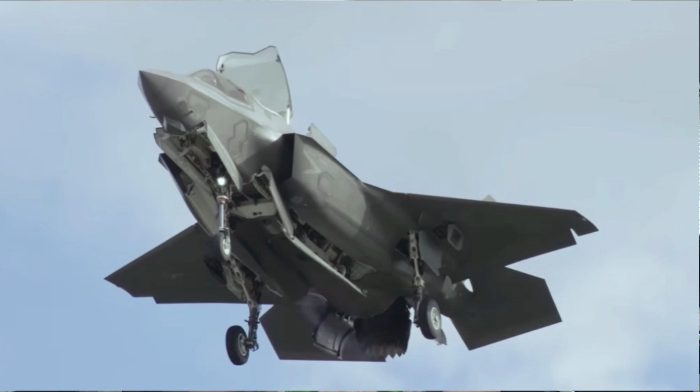But to compensate for that weight while adding all those 19 doors, we're going to replace some EDFs. So what I'm going to do is remove this heavy 130mm EDF. There are now two Schübeler installed, which together with the ESCs weigh almost 5.5 kilos. So I'm going to swap them to those compact 120mm from JP, which is only 680 grams.

So this will be, for example, like 200 grams for the ESCs, 2 times. That gives 1.6 kilos total instead of 5.5 with the Schübeler. This is a big reduction in weight. And this 120 can also push like 9 kilos, so we're going to use 2 of those. And for roll stability, we're going to add 2 40mm EDFs, which are tilted in the fuselage.

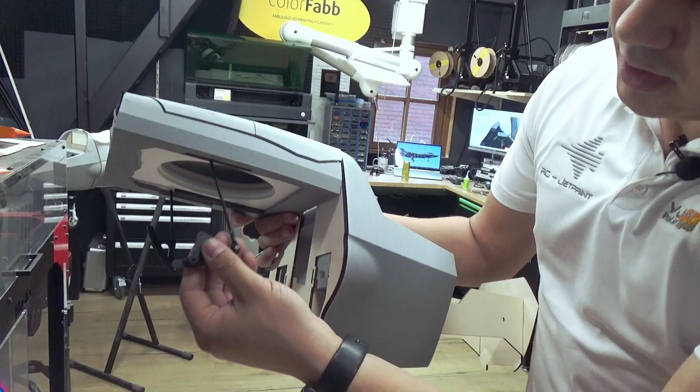In this video we're going to concentrate also on the lift fan module. It has to be compact, and I really like this new style of printing. So we're going to adjust our skin set to a 3mm thick skin, sandwich filled with gyroid infill and a double layer outer layer.

We're going to use the filaments from Colorfabb, and we're going to implement this inlet section, which is pretty amazingly scale, and it will really give us more performance from that 120mm EDF.

Also the spars are going to be laser cut, so we're going to use the all new Creality Falcon2. I will do a small review during this video about this laser. The links are all in the description, by the way, and we're going to use the foaming filaments from Colorfabb.

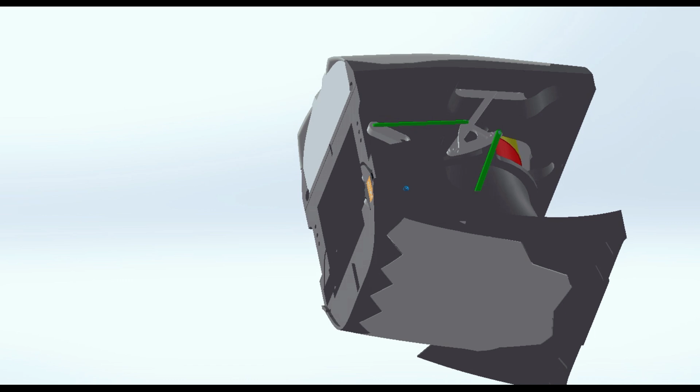Okay, let me show you the lift fan module. It has an upper lift fan door, 2 lower lift fan doors, and I connected them all with just one single servo and a push rod system. So as you can see, all doors are aligned really closely. The push rods are accurate to 1/10 of a millimeter.

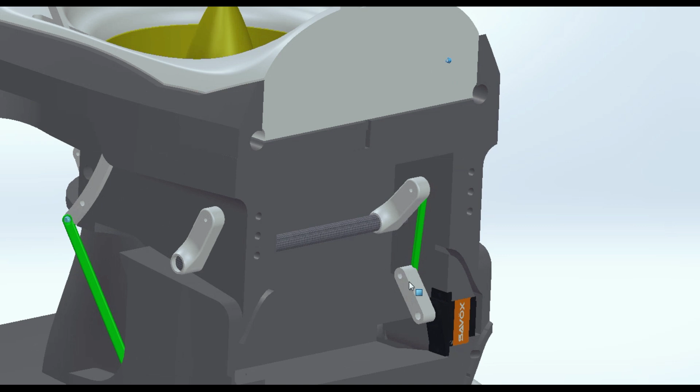So what happens when I open this door? Bam! It all opens really nicely. We can go even more. Now it's maximum open, and as you can see, the angle is accurate. If you look on the side, the angle is accurate compared to the real F-35. Also, the top lift fan door is angled at the correct position, and most importantly, we don't have any collisions.

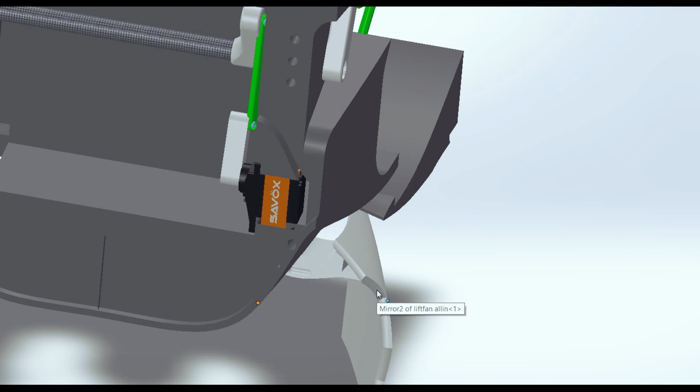Look at it, guys, this is really cool. Let me close it a little bit more so you can see there aren't any collisions. Look at it, this is really nice.

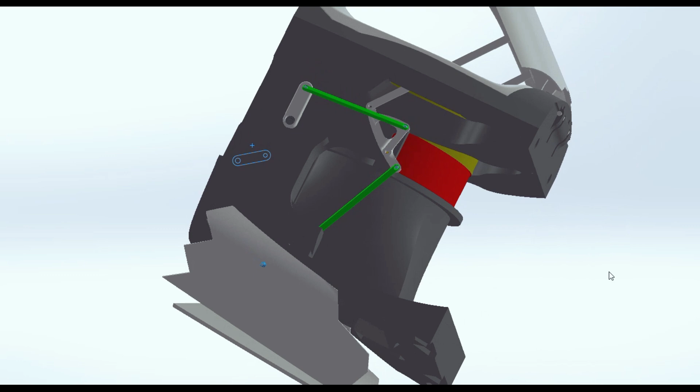And also the JP 120mm is installed there, and the housing is installed directly during the print. So this will be really easy. So the next question is how to remove the JP 120.

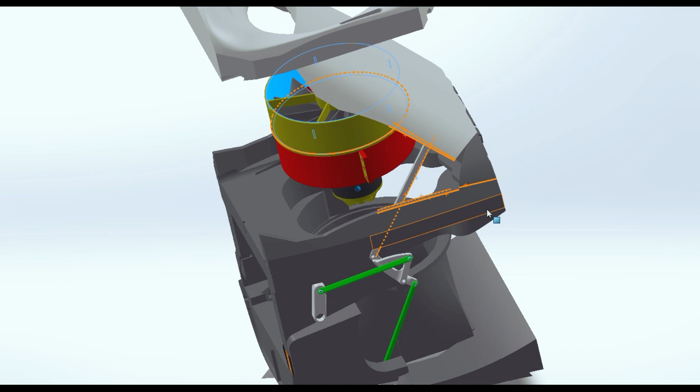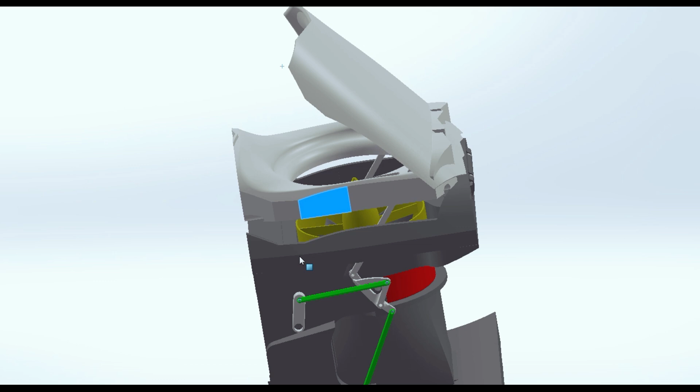So in this video we're going to make this lift fan module, and we're going to assemble it and see if it works.

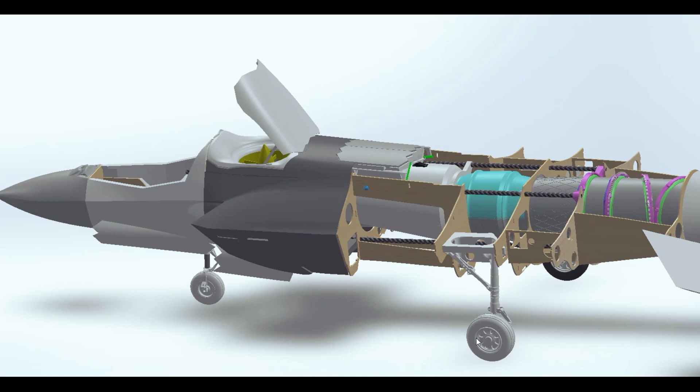Now guys, I'm really proud of my design of the F-35. It's quite big, believe me. And as you can see, I already made the cutouts for those navigation lights.

So here you can see the lift fan module installed, it's all working really nicely. But the F-35 has some more doors. And at the end of the video I try to finish this with the laser cut parts from the Creality.

So let's see if we can speed up this build. We got also the scale landing gear, let me show you how this works.

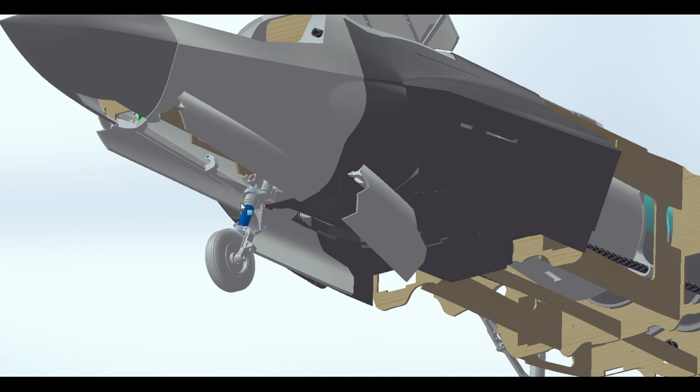So we got our front landing gear, which goes in really nicely. And as you can see inside, there aren't any collisions. There is one servo in the nose, which is connected to all those doors for the front nose landing gear.

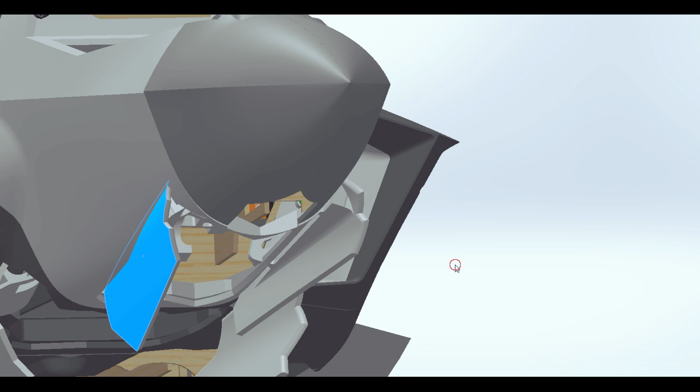So this closes and opens also really well. I see I miss a constraint there. Sometimes SolidWorks isn't that really funny, so let me see if I can fix that really quickly.

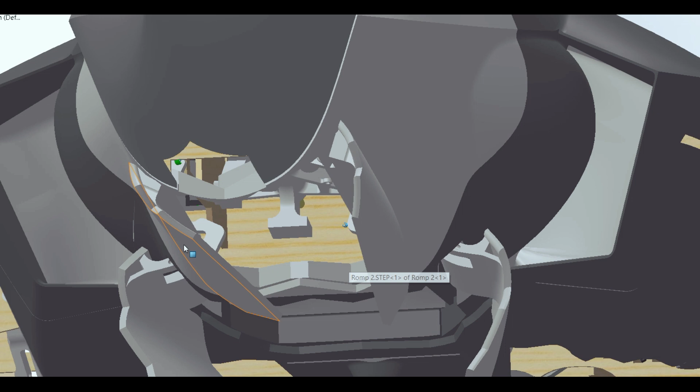There we go, let's see if it works now. Oh, this one is also losing a constraint. So mates with this one. Perfect.

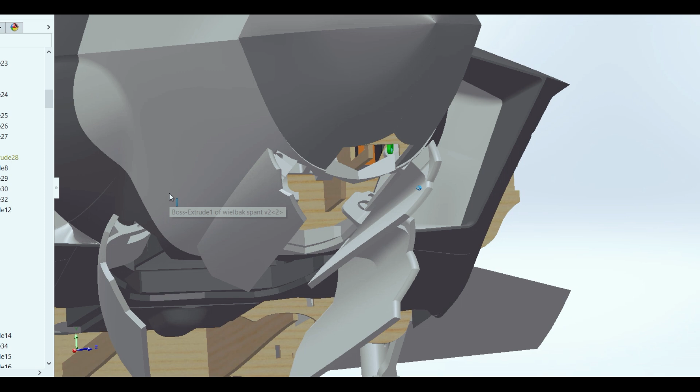So here you go, and now it should open and close almost nicely. Let me fix that really quickly.

Which is bothering me now? Oh, this one is missing. This. So let's give it another try. This one is also not accurate. This must be.

So let's try it over. Yes, now it works, see? Awesome.

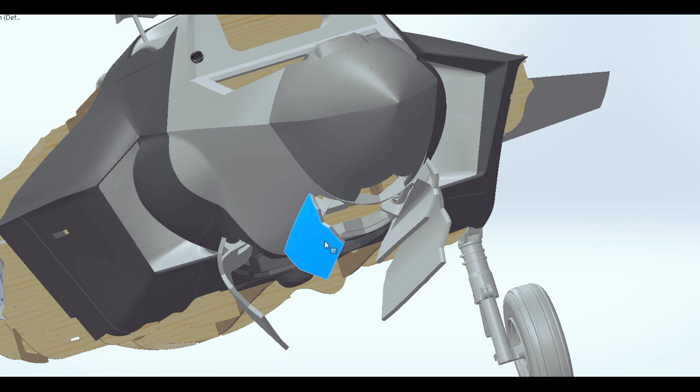And also the wonderful thing about these doors is we don't have any collisions. Everything works really fine and smoothly.

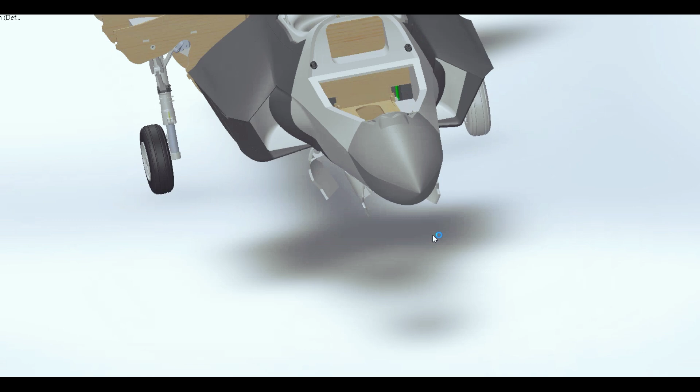So I also worked on the inlet, which fits really nicely to the ducting.

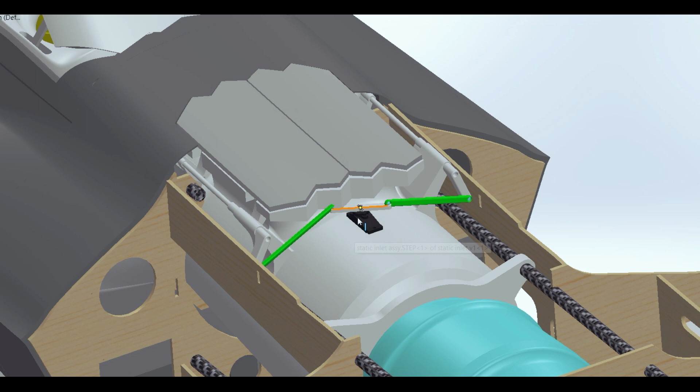Really happy about this, and we got also our static inlet doors from the F-35. So I use one servo in the middle, connected with two push rods, and here we go.

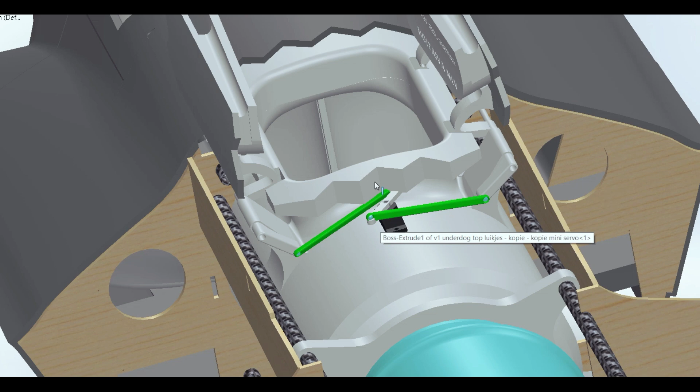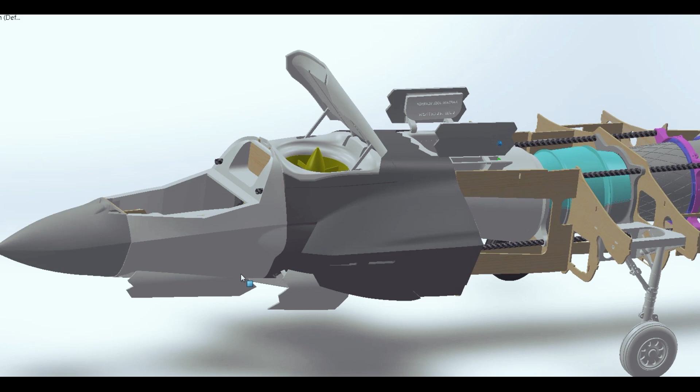But we will do it together. So I will leave them open to give you a really nice scale look of the F-35. Let me take out the gear.

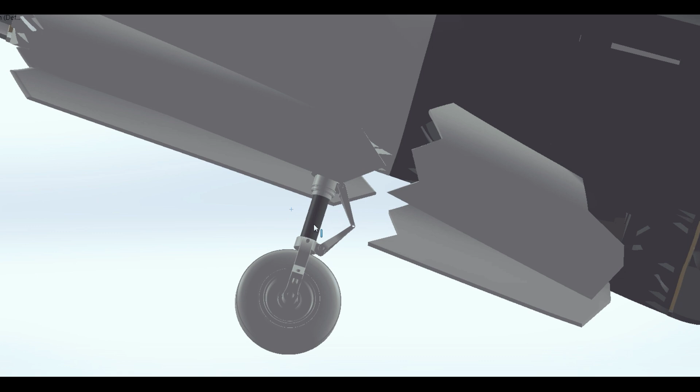This gear will be driven by a linear servo from JP. And if you look into the static inlet, it is all very smooth.

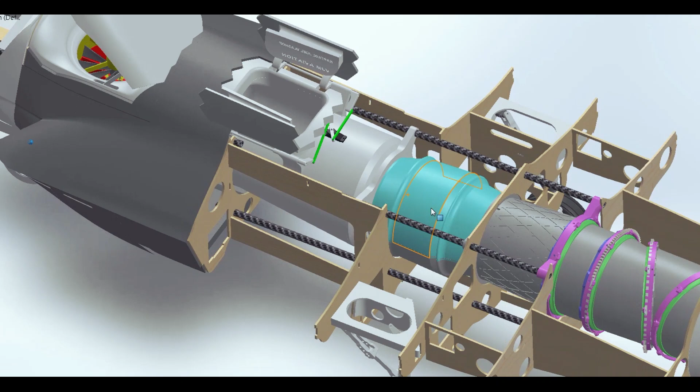Also in this section, the turbine section, it looks like a turbine, which I find really cool, but actually there's a JP installed. Let me show you.

And I will make it transparent so you can see the JP there as well. So, 2 times JP 120. Awesome. Okay, let's continue the build.

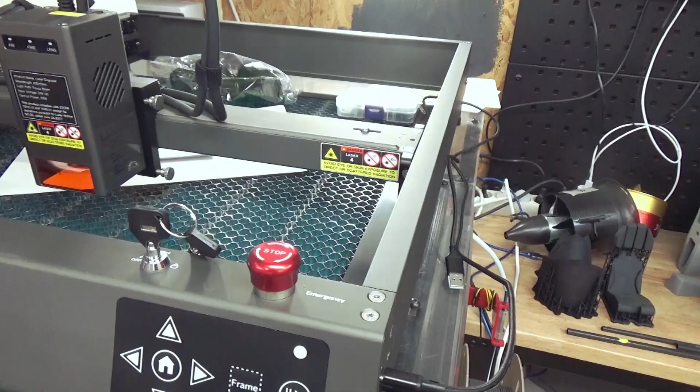Well guys, this is the Falcon2, which is actually a quite clean machine. So I'm a big fan of infrared lasers, and this is a 22 watt diode laser, which looks actually quite stunning. It comes with an air pump, a nice honeycomb bed, and there's also an option to put it in an enclosure. But for me it's really important how fast it can cut, how deep it can cut, and how accurate and nice that goes.

It's a quite easy laser without a display. I really like that you can see the feedback of air, fire, and whether the lens is okay. So that's quite good, and we got a simple framing button.

So for software I will use Lightburn. So let's laser something.

Before I started the video, I could tell you all about the details, how fast and all those examples, but I don't want to bother you with all those details. You can find it on the internet as well.

So I cut this test piece from Lightburn, and as you can see, it's quite good. This is 3mm plywood, and the lowest setting is 88.9% with a speed of 833, single pass. This is actually a quite good result. Really happy with it. It can go even faster or deeper because we still got some markings left over.

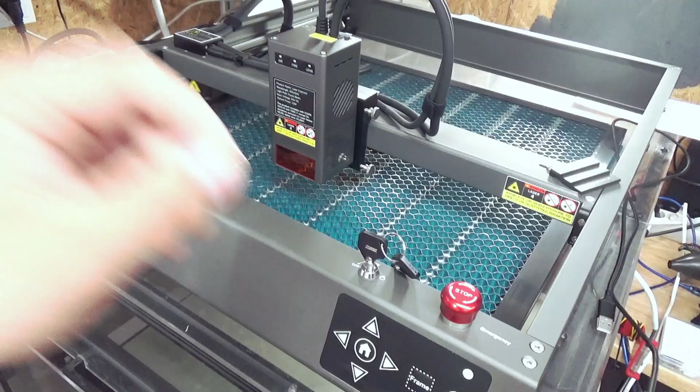Okay, let's cut some F-35 parts. Okay, let's turn on the laser. We got our feedback, the pump is doing a self-test. And let's bring her home. Brilliant, we're good to go.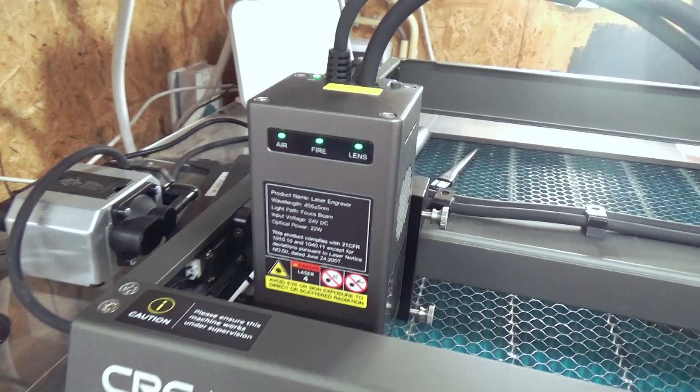Okay, so I exported all the parts into Lightburn. So let's cut those pieces out of 3mm plywood.

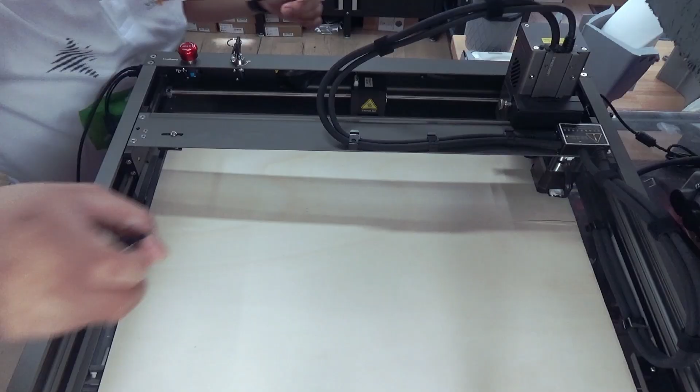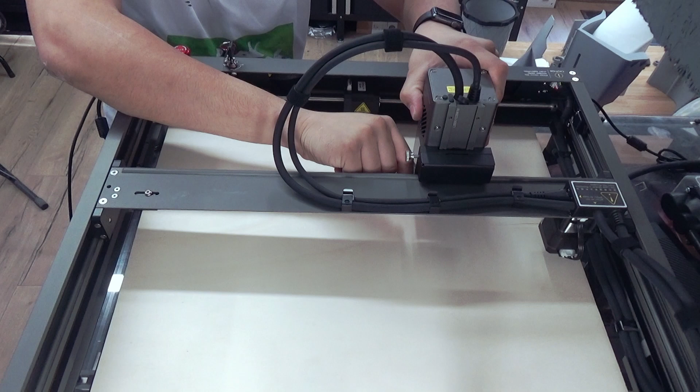Done. So let's home. Okay, let's go.

We're using now 90% of energy, speed is 800 millimeters per minute. Oh, this looks really sharp. Oh wow, look how sharp the lines are, and it's already cut all the way through. Amazing.

So while the laser is cutting, you can see a lot of smoke development.

Creality has a nice enclosure box. I'm a big fan of the xTool, but a good alternative is also Creality with the Falcon2 or the Ortur. But guys, the quality of this Falcon2 is perfect.

Let me show you the enclosure while it's lasering. Okay, safety is everything. So this is actually the tent where you can put it in. It's got also the fan with a wire with a USB connector.

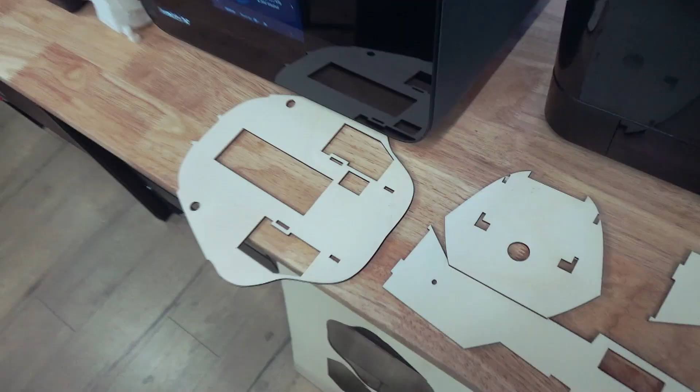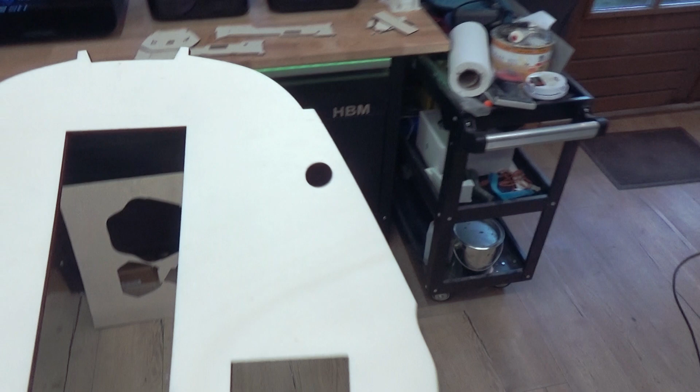Okay guys, I'm really happy about the results. I didn't sand it, it just came out like this out of the laser. So also the back side is clean and the top side is clean. This is all because of the air assist and the honeycomb bed. But look how smooth the edges are. It's not burnt, it's just light brown. So good job, Creality. So let me assemble these parts.

But first we're going to put the laser inside of this enclosure and do our next bulkhead, which is the bulkhead for before the lift fan. Let's go.

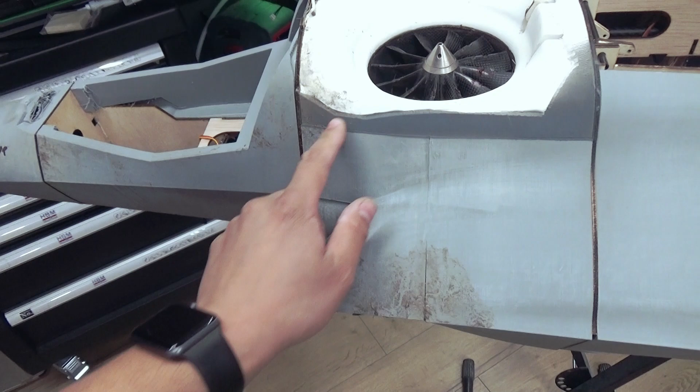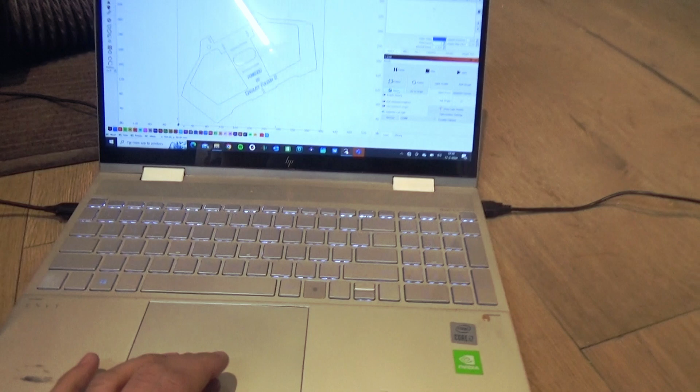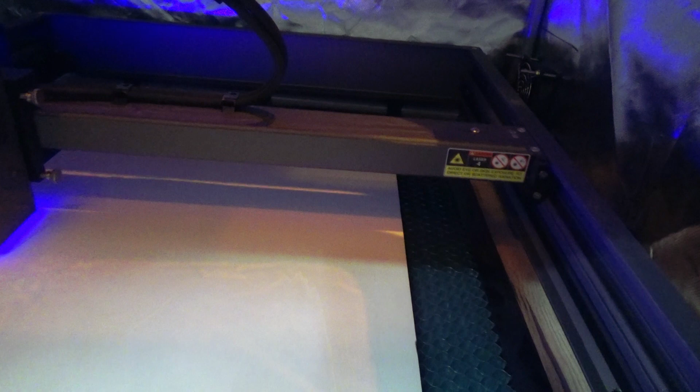Okay guys, the enclosure is around, so let's home it first. Okay, let's frame it. As you can see, there should be a laser. Well, we need more space. Okay, I need to turn the part. Okay, the hose is actually blowing. The enclosure is closed. So let's start it.

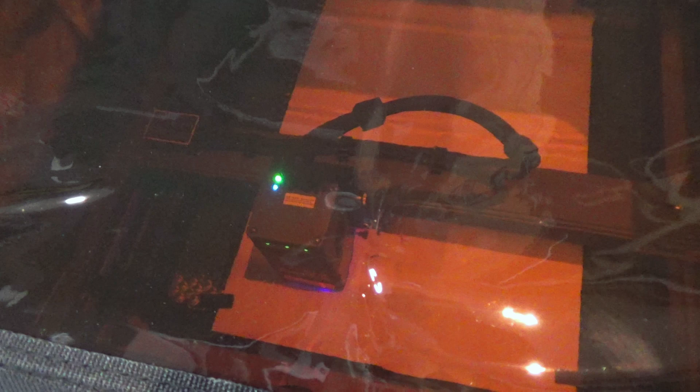It is cutting really nicely, and the smoke is now outside. Brilliant.

So let's wait to see what comes out. Well, this is working really nice. It's really hard to see in the camera, but you see the smoke really coming out. Nice.

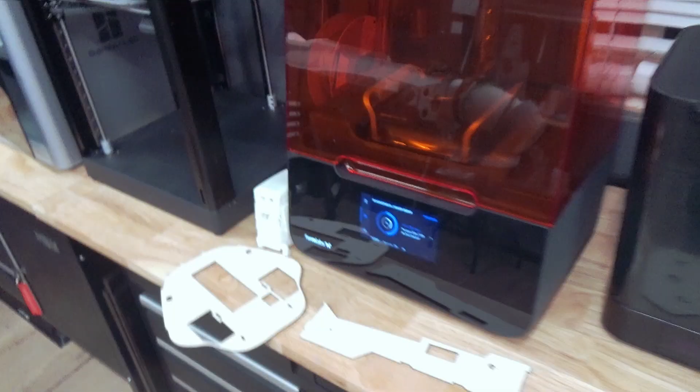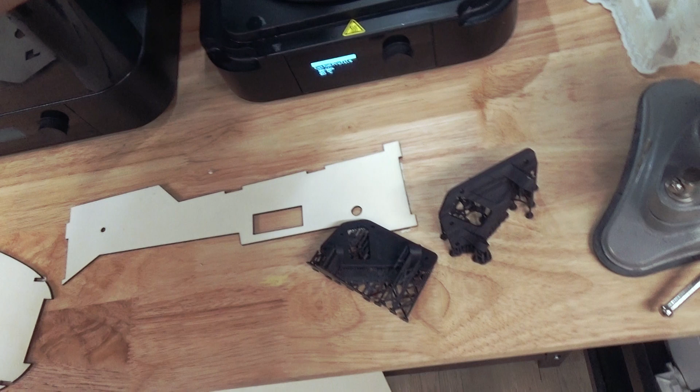Meanwhile, the Formlabs is printing the landing gear parts. Yes, this looks quite stunning. Awesome.

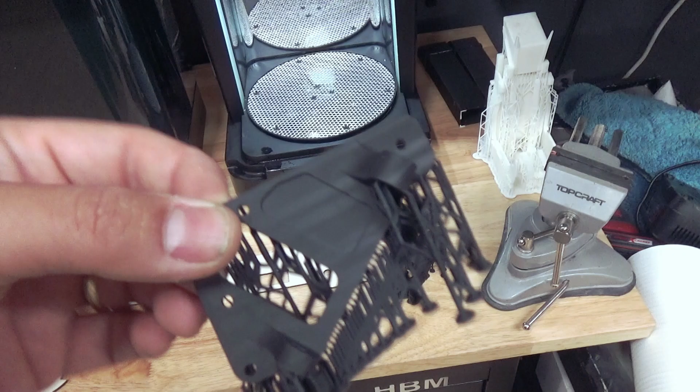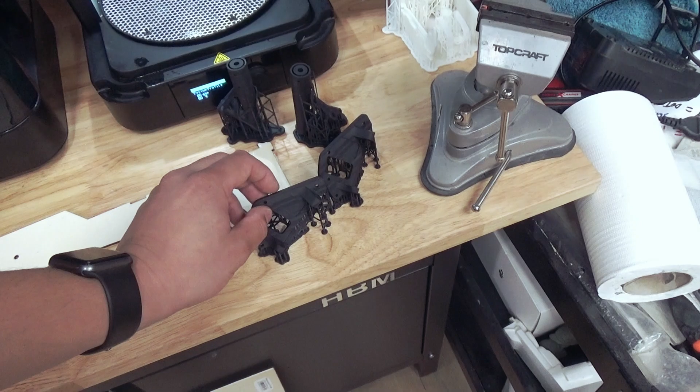Okay, let's focus on our laser cut. It's almost finished, I see it already started to engrave. Cool.

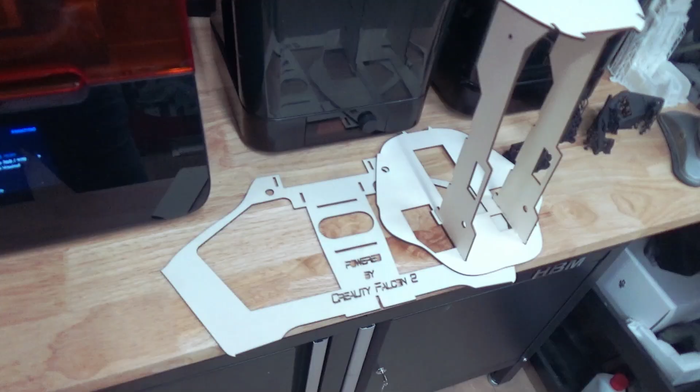Well guys, I'm really happy with the quality of the Falcon2. It works fine, the enclosure. So all the smoke will be guided outside of the workshop.

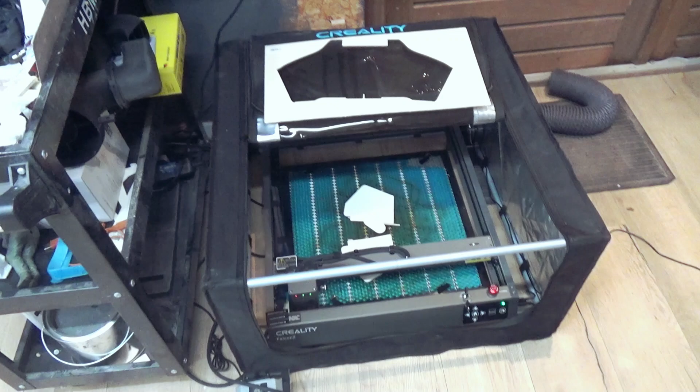So let's continue with printing the rest of the parts for the F-35.

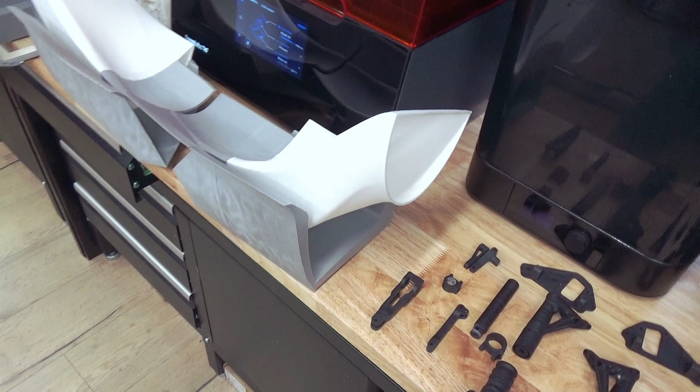Well guys, the parts are rolling in. I already pre-assembled the inlet unit, which looks really awesome. These holes are for the navigation lights, and I added also these on the tail fin.

Look guys, how cool this is. This is glow in the dark. This is filament from Bambu Lab. And they are really bright, as you can see.

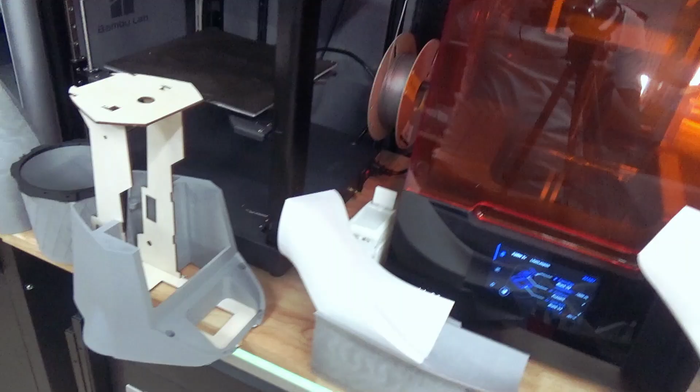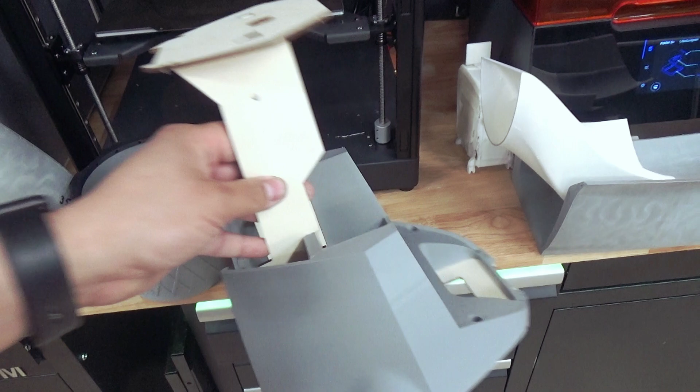Meanwhile, I can edit the videos and assemble. So I already pre-assembled this inlet section together with the nose section. So let's have a closer look.

Okay guys, I really start liking this new way of assembling airplanes. So we got our wooden plywood parts. I can cut out more wood to save some weight, but yeah, since it's a prototype there will still be some faults inside. But yeah, I really love building it like modules.

So here we got also our top lift fan door. The push rods are already installed. Look.

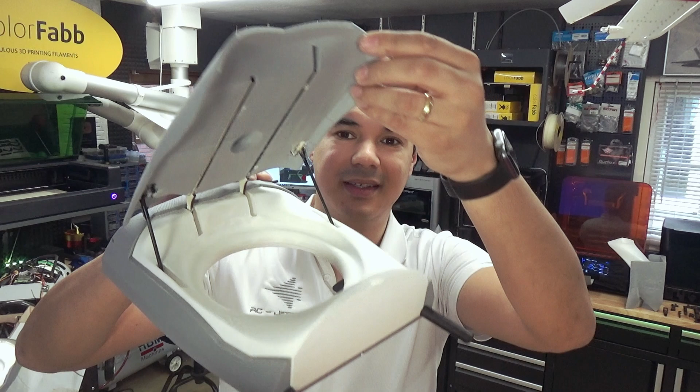And to align everything correctly with others, I use lightweight carbon tubes, 10 millimeters, and this should slide in like a puzzle.

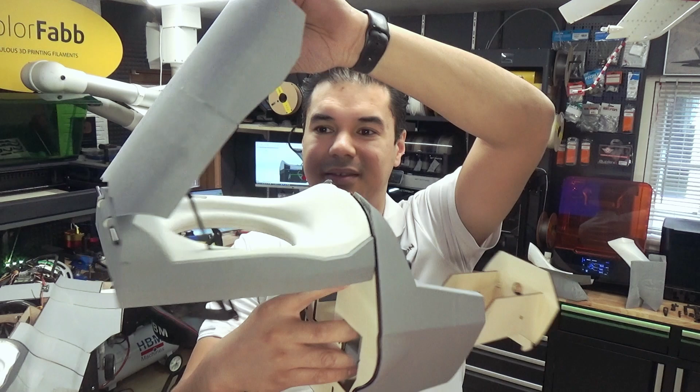Amazing. And here you got already a piece of the F-35 with the lift fan door. Amazing. Wow. That aligns really nicely.

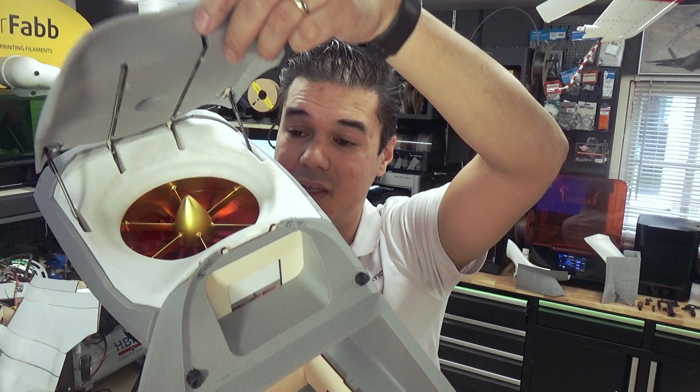And let me test fit it. And this is how it looks like. This is really nice and lightweight. So let's continue the build.

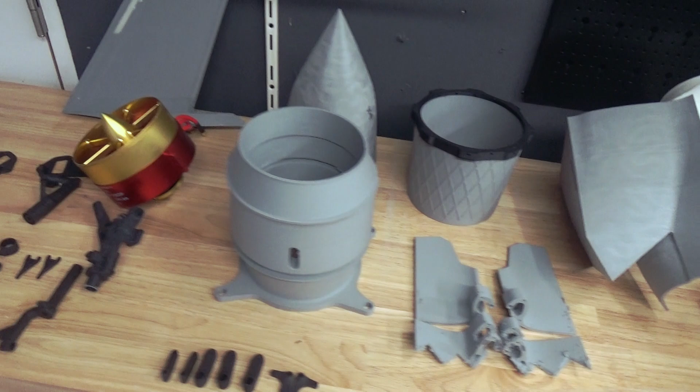Okay, it's Sunday morning. These are all the parts that are already collected. We got the resin printed landing gear parts, which I still need to assemble. I'm going to show you how the motor house works.

I made it actually to enclose it with magnets and carbon fiber pins. So let me show you how I put the motor in. Okay guys, this is the 120mm housing for the JP.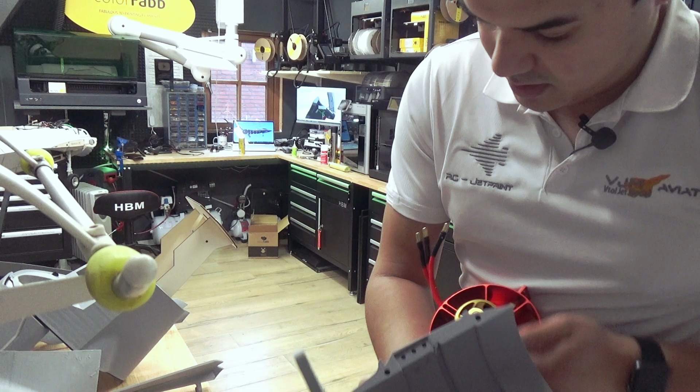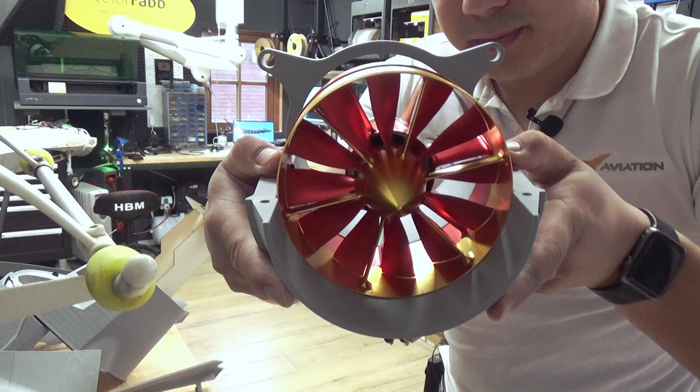What you can do when this is installed, you just install it like so. It's pretty much aligned, and then you get these holes. I will put some very strong magnets there - thank you Hans for those magnets. And then we enclose this, and now we got a really nice motor house which looks like a turbine.

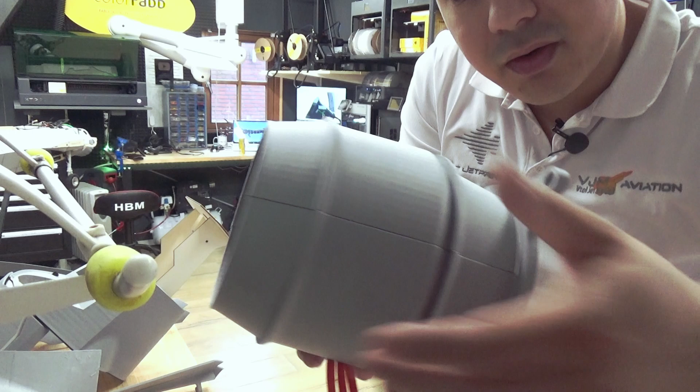Don't forget guys, this JP can push over 9 kilos on 12S. So this is quite brilliant. Okay, let's proceed.

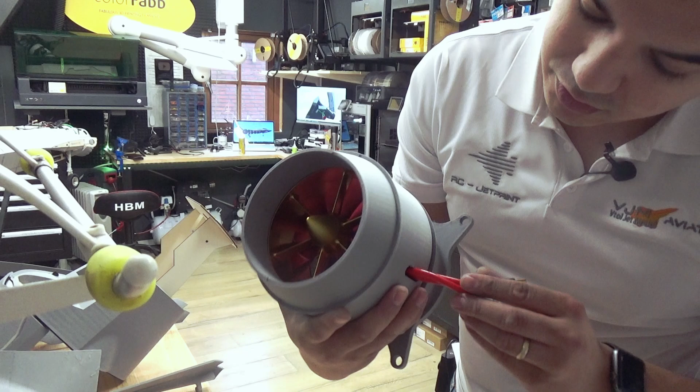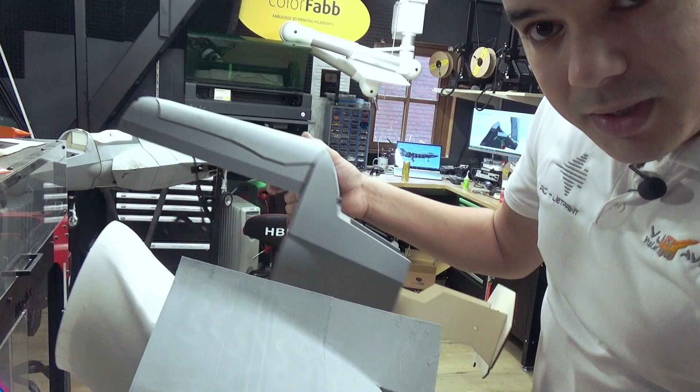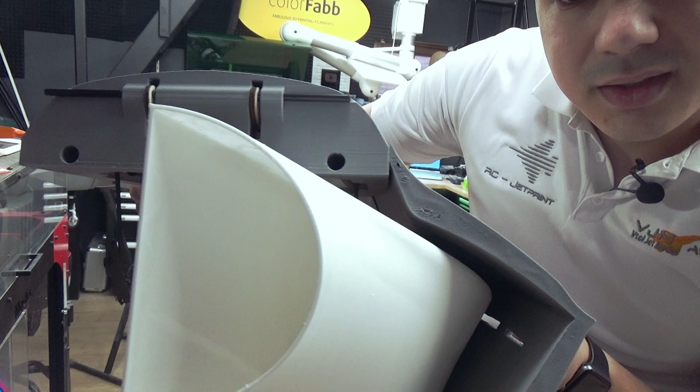Inlet - so when the print is finished, I will print these glow-in-the-dark navigation lights, and I will show you the results later in the video.

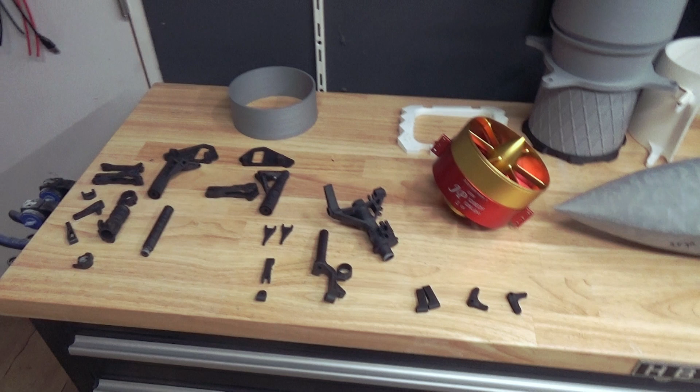Okay guys, unfortunately I couldn't finish all parts before the end of this video. It's already Sunday evening, time to edit this video to put it online this evening. But I'm quite happy with what we reached together.

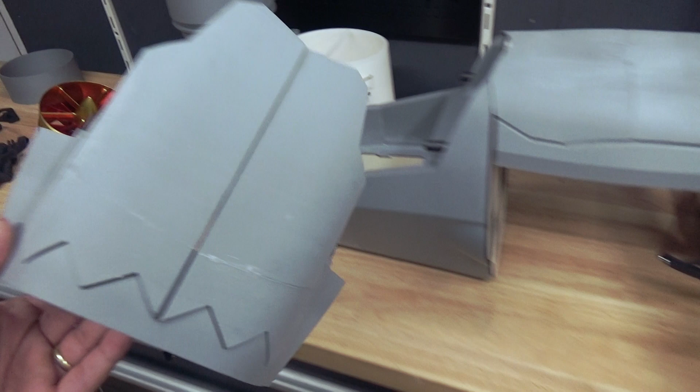The parts fit really nicely. We got some small minor collisions, but I already fixed that in the new designs, and I adapted this already in the new parts. Yeah, the lift fan housing is coming really nicely together. The alignment is quite nice.

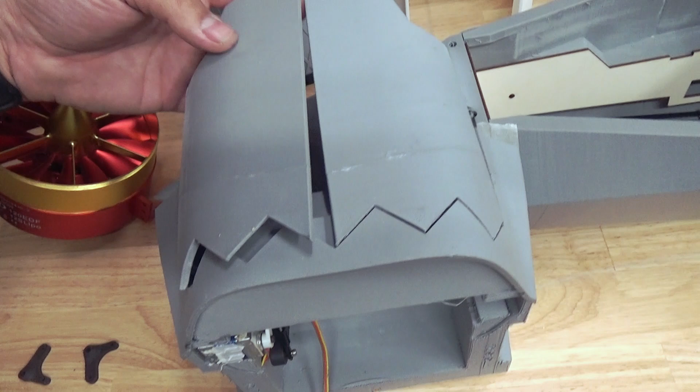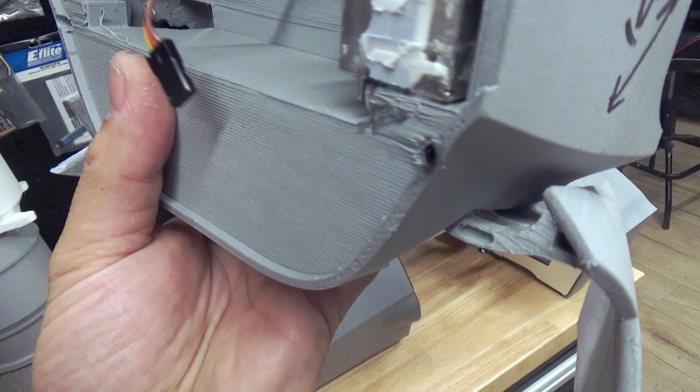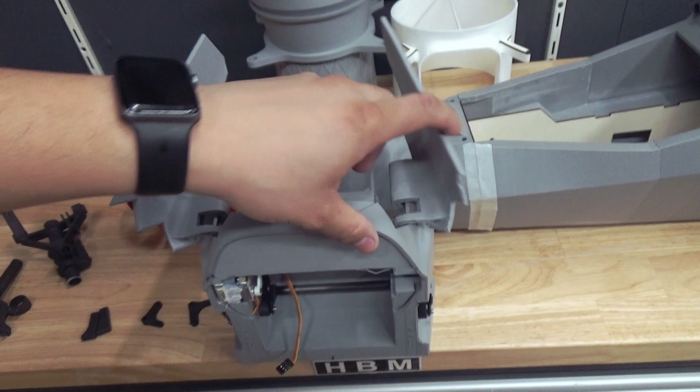So let me close it. And also the alignment is quite nice. So I'm waiting for the big part.

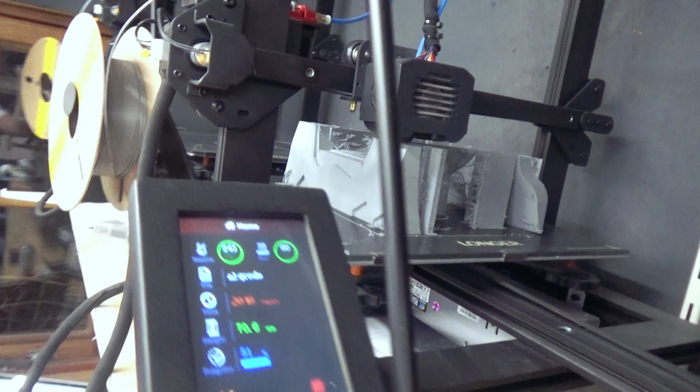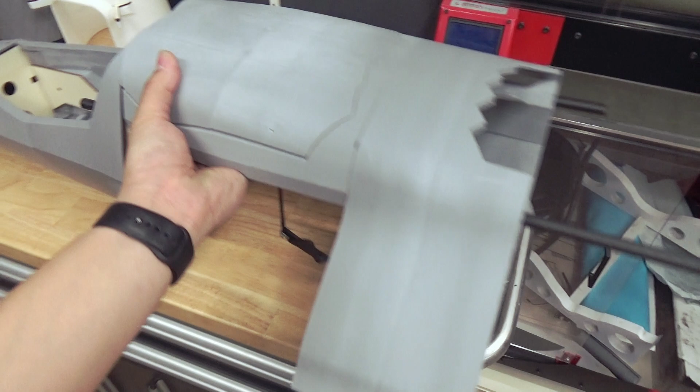This is the back side of the lift fan housing. So yeah, let's make sure that you are subscribed to our channel and hit that notification bell so that you won't miss out on the videos.

Also, this part is becoming quite stable. Look how huge this part is. So this is version 2. We got version 1, which is a static hover model with wings, but now we are building actually a first functional model.

Which looks amazing. So in this version 1 model, you see the spars, the laser cut spars, and what I've now done is I integrated the spars into the wing, like in the 3mm sandwich core skin. So this looks way better.

This nose section isn't glued yet because I still need to add the servo and the landing gear. Also, the landing gear doors are really nicely aligned. Be careful, but also no collision there as well. It looks amazing, isn't it?